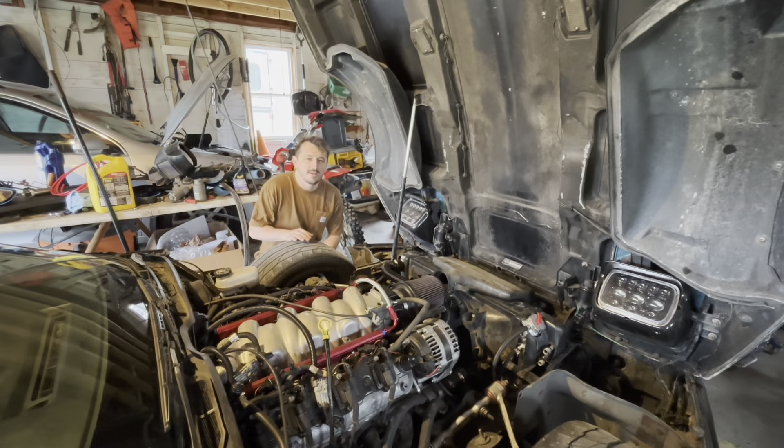Today I want to do something a little different, something more creative, and probably there's other people out there that have this issue, that have LS swapped their C4 Corvettes.

As you can see, I basically have an issue where my intake temps, it's only like 70 degrees outside, and my intake temperatures are seeing 130, 135 degrees, and it's still cool out. Once summer comes, I expect probably to see 150, 160 with all these underhood temperatures and heat coming off the pavement.

So this is a stock air box. I have a little under 3 here and a 4-inch off the throttle body. So my dilemma is, how am I gonna get this connected into something like this while avoiding this big restriction here.

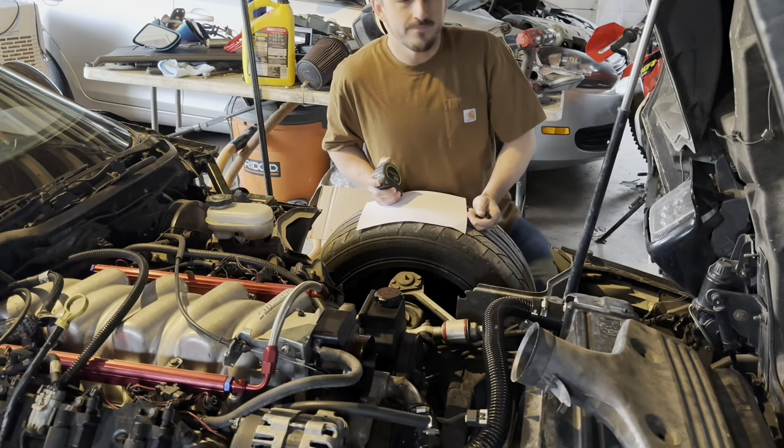What I want to do is design on FreeCAD and 3D print something that comes 4-inch up a little bit, ovals out, and connects into this factory air box. Alright, well, time to get measuring.

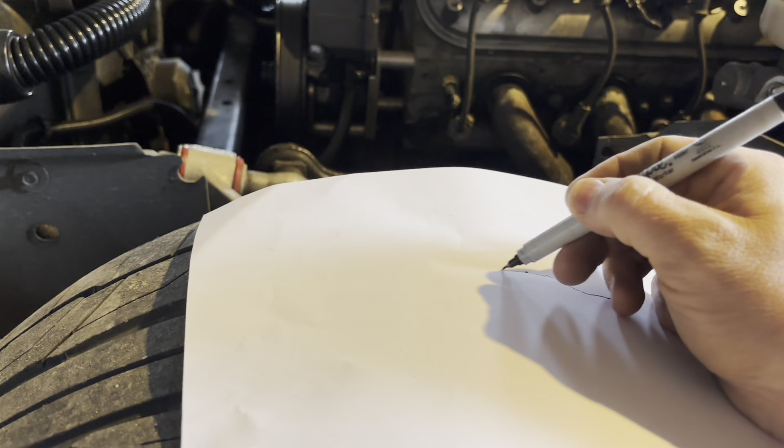Up to where that's gonna be, that's about a 3-inch riser. So basically, I know I'm gonna have a line here. It's gonna come out and immediately have to go up, across, and kind of slope back down.

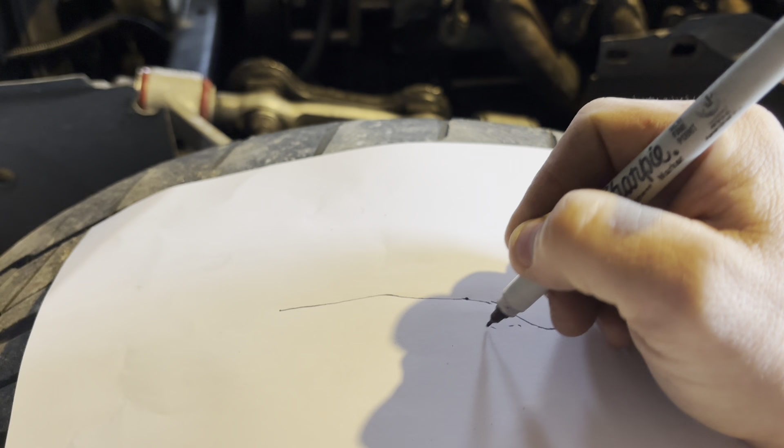This is obviously a very terrible drawing on a tire, but I know that the distance between here and about the peak where that radiator is, let's just call it here, this will be the radiator. This height right here is going to be 3 inches.

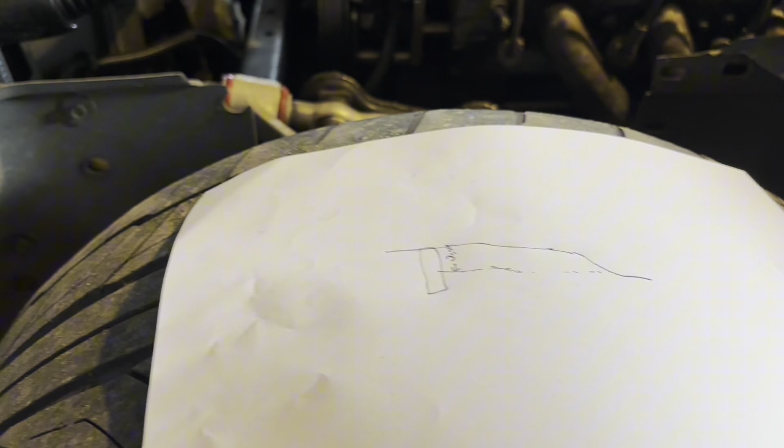And I might have to do a couple iterations of this. And then I gotta take my tape measure again, but kind of measure this way.

Overall length of this thing, I'm gonna have a silicone coupler on the throttle body, but the overall size of this thing, let's just call it 15 inches. This is 15 inches, so I'll have to print this in 2 sections.

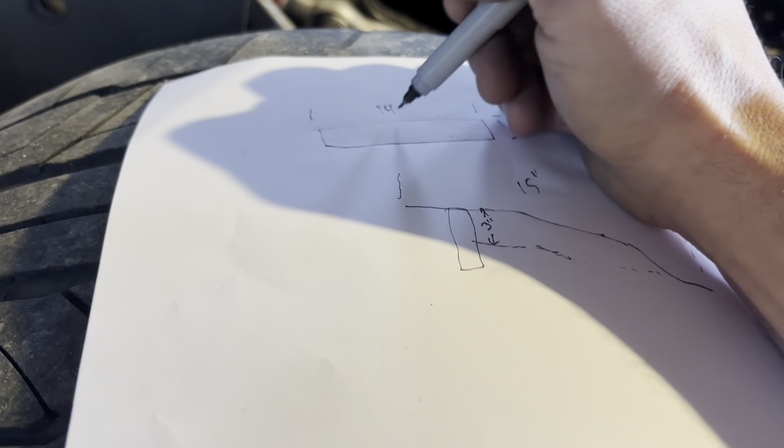It's gonna have to be something like this, it'll be like 1.625. And the width I measured, never know, could be wrong, about 14. Let's call it 14, this is just gonna be a test piece anyways. 14 inches.

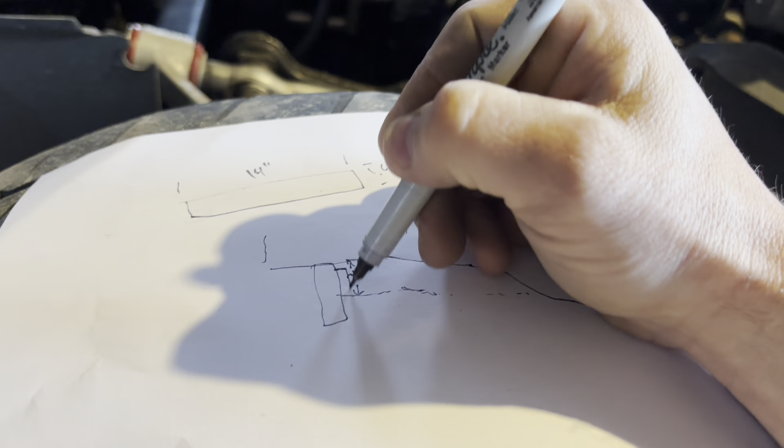And the point at which I need to be fully up and over this high spot is about 10 inches. This is my radiator, so my radiator fan kind of comes off like this, and there's a little high spot. But this distance is about 10 inches from here to here.

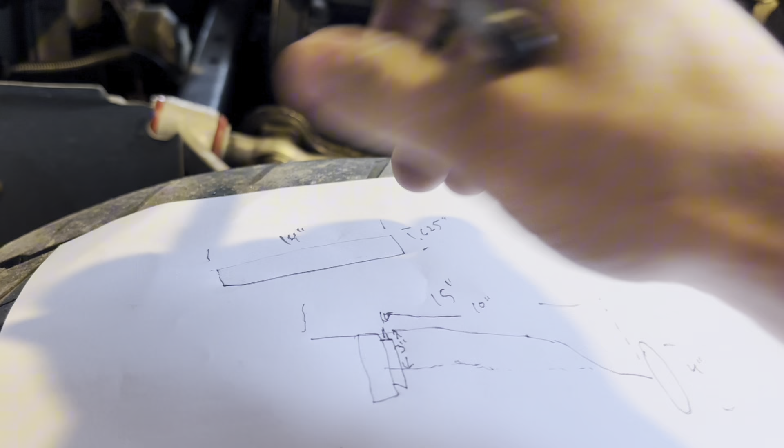So basically the way I'm gonna draw this thing, I gotta draw my 4-inch diameter over here in CAD. And then over here, I'll have to draw this rectangular piece over here. And I have this line that I'm gonna draw and tell it to sweep.

And then you go into this pipe function. You can say, go from here, along this line, start at this shape, and extrude a pipe to this shape, which is gonna be on this end, and it will automatically morph that.

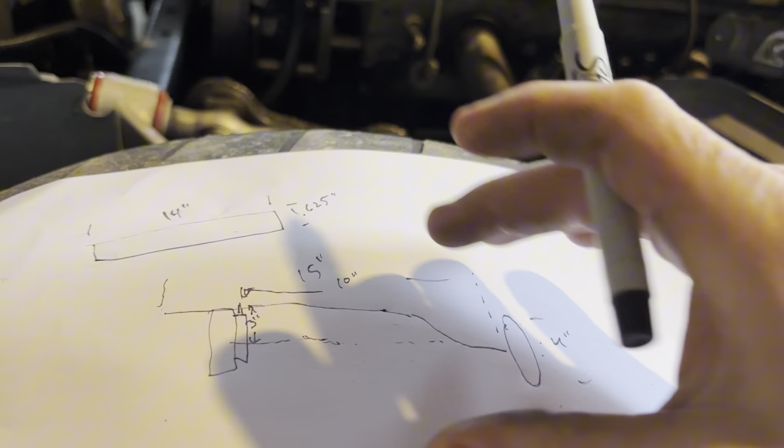And then I can get it in, play with it, see what needs to be changed, edit this awesome sketch, and then reprint it again. So let's go take this and transfer it over to the computer.

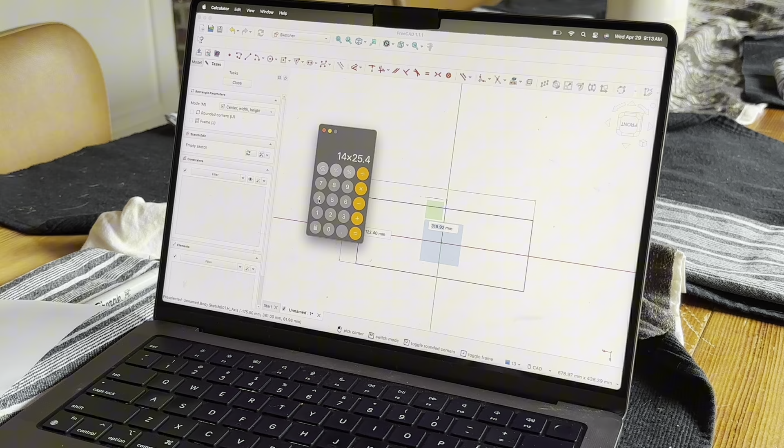So my original sketch would be this circle. I'm gonna say, bam, I wanna use this. I'm gonna sweep this along this spline, so path to sweep along. I need to add an edge.

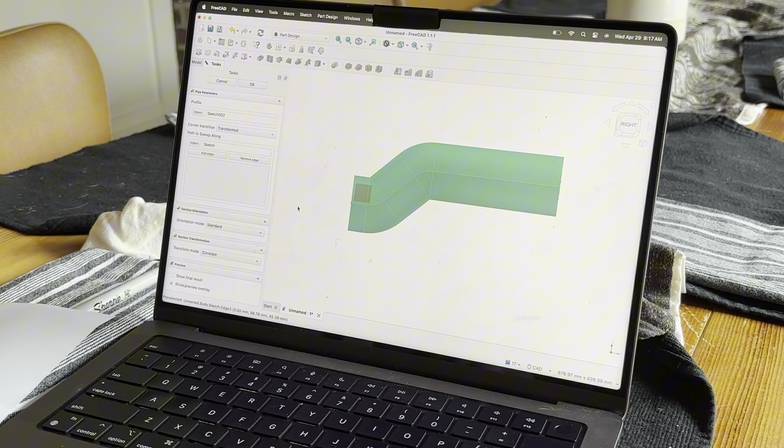Okay, so as you can see, you have a 4-inch pipe following this, but I actually want it, so right here you say section transformation. I want to do multisection because I want it to kind of fan out to this shape right here.

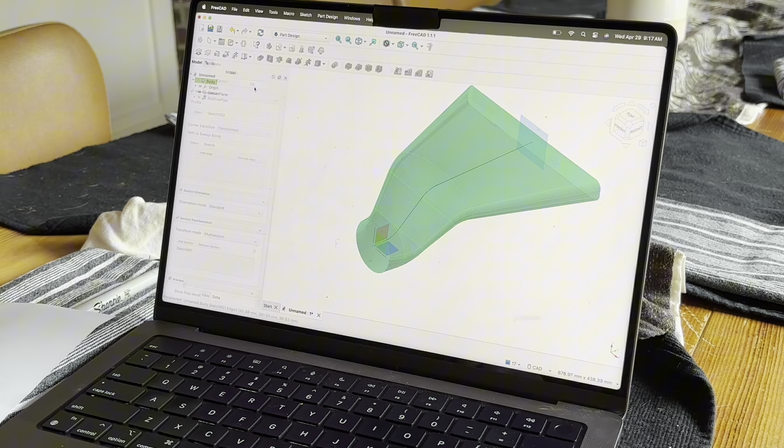So I will go add section, I'm just gonna click on it. Bam! Ain't that the coolest thing you ever seen? All right, so there it is. And that's kind of the idea.

I have a feeling I'm gonna have to actually take this sketch and make another one here so it does this transformation a little sooner. And what I'll do is I'm just gonna kind of play with this a little bit.

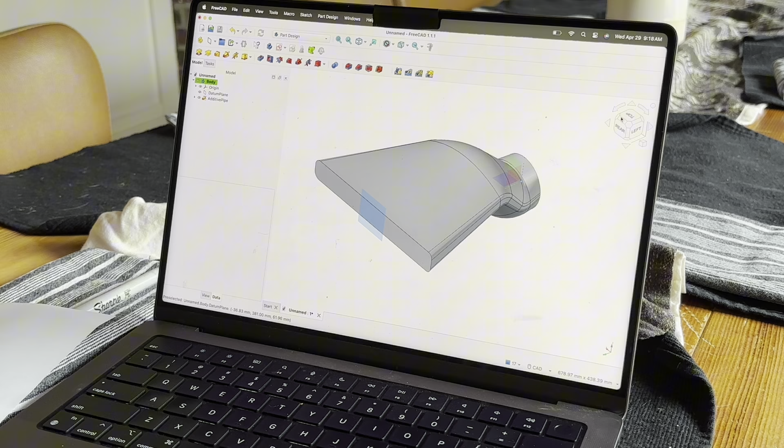I might end up taking this sketch, sweeping it down this way and putting a little bump in it at the point where my radiator fan is because I don't want it to hit. But that's also something I can probably heat up with a heat gun and warp it to where I want it, then take a measurement of that on the second iteration.

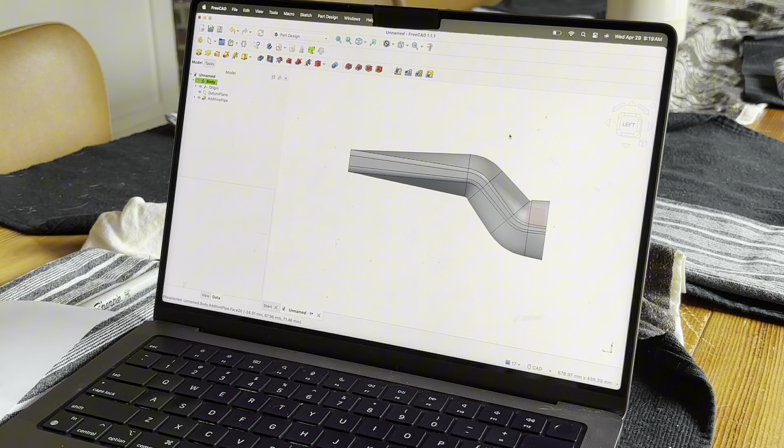So open this up, boom. As you can see, this thing's huge, it's way too big. I'm thinking that I'll definitely have to break this thing up.

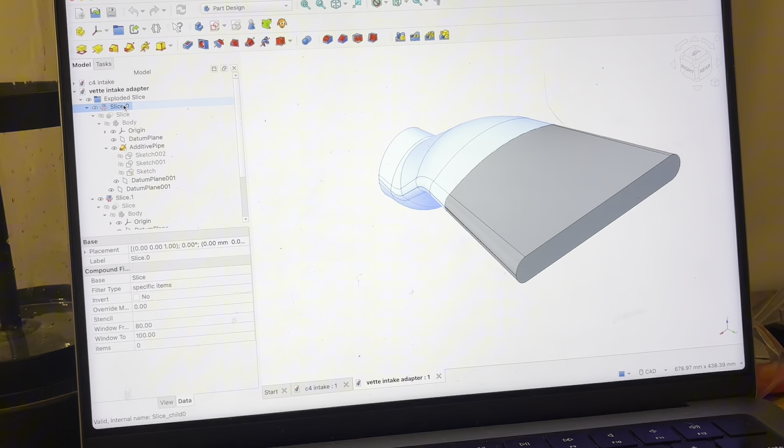All right, so just a quick check-in. I was actually able to finish this and slice it into 2 sections that could be printed on my printer. And here they are, the 2 plates that it's gonna be printed on.

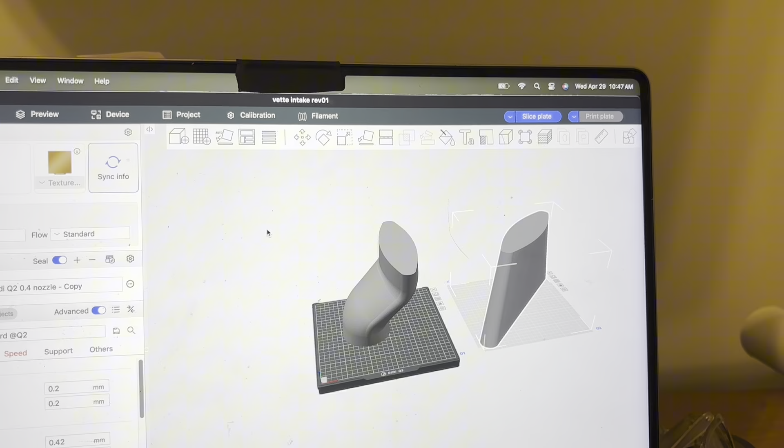Currently printing this one, and then I can print that. It'll be just like a butt connection on this surface to this surface for now, but it will be turned into a slip fit once I finalize the overall design, just because modifying that's gonna be something new to me, but I'll be able to do it. And that's where she's at now, it's printing. I have like an hour and a half to 2 hours left in the print.

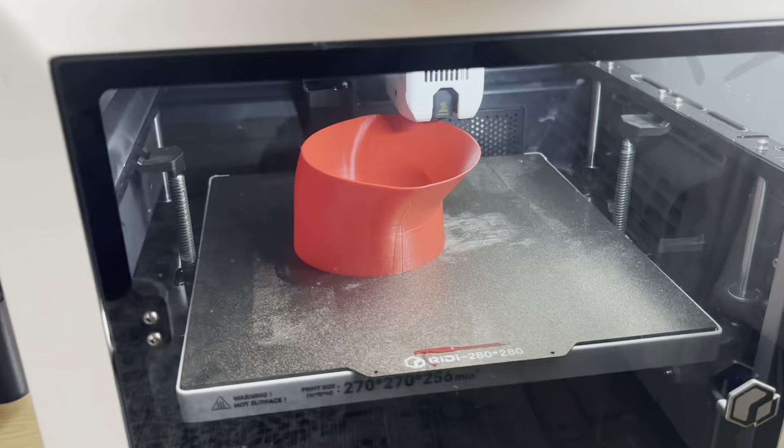So let's go get our eyes on it. And this is what it looks like in real life. But yeah, just working on it.

So I'll get this print finished, start the next one. I'll get them glued together real quick and we'll go test fit them on the car, see if it's even close. I fully expect to have to change a bunch of stuff and modify things, but we'll make some changes along the way. We'll see you in a few minutes.

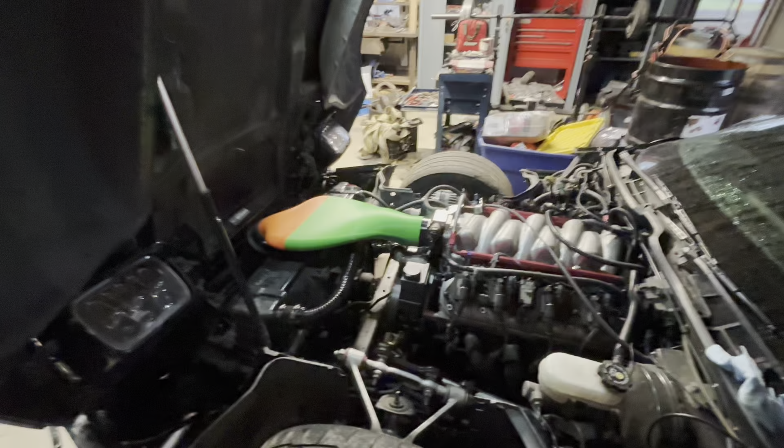Hey guys, so basically this is what I've come up with so far. This is by far not my final design.

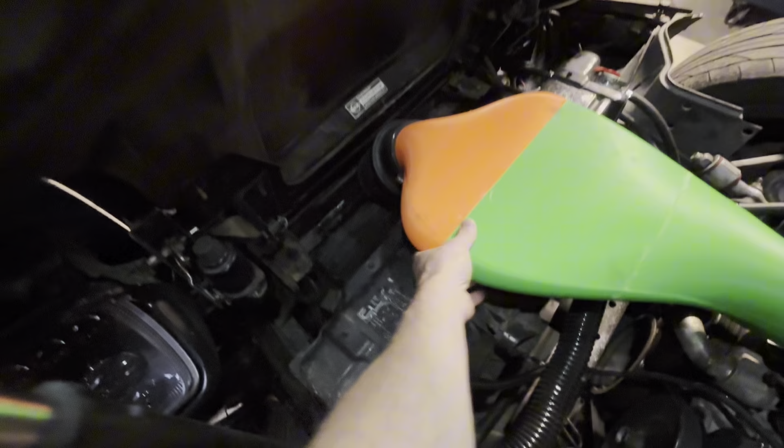4-inch goes to, I forget what this is, I think it's like a 9 or 10 inch wide oval down to the filter. The filter, I realize, is still hitting the front here, which jacks this up, so I can't close it because it'll hit. But without this filter, it actually does sit just fine. So one thing I'm thinking about doing, I'm kind of limited to the CAD on this because going from 4-inch to this big gobby shape down to a 4-inch with the tools I'm currently using.

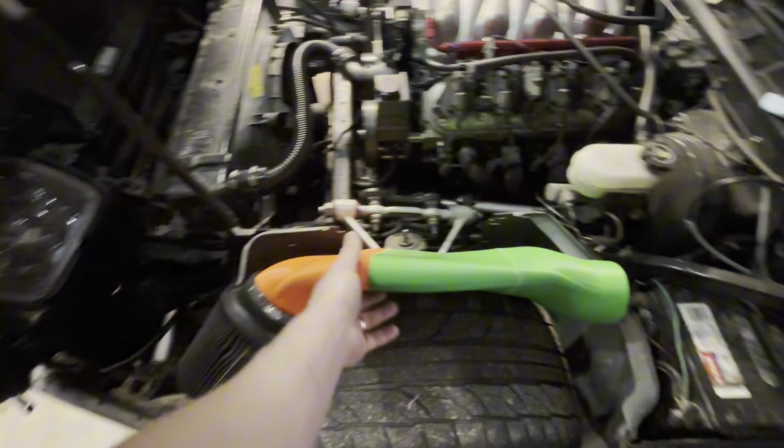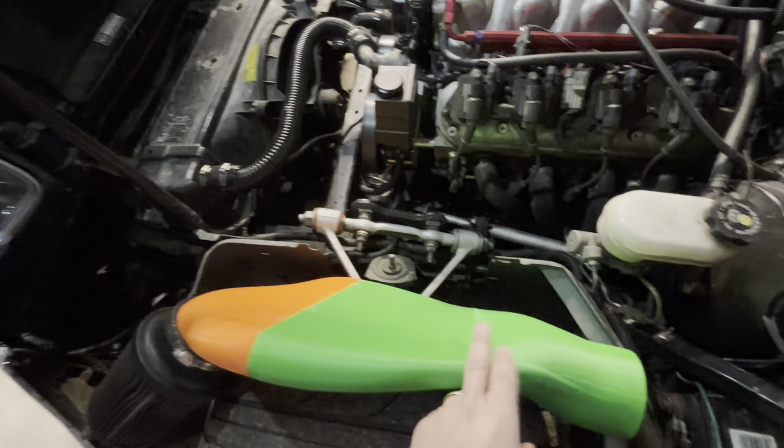And my only know-how so far is this additive pipe feature, and it does its own little wonky shapes here because it's trying to interpolate how to get this from a 4-inch here up to this shape, which there's another one here. I had to put one here because it would try and do some crazy stuff, so I had an oval to a bigger oval to another oval somewhere. I think it's right on this 45, or actually like a 22 and a half, and then at this 45 there's two 4-inch circles to try and get it into the filter. So it looks like it might work.

This would be carbon fiber or possibly some other 3D printed plastic.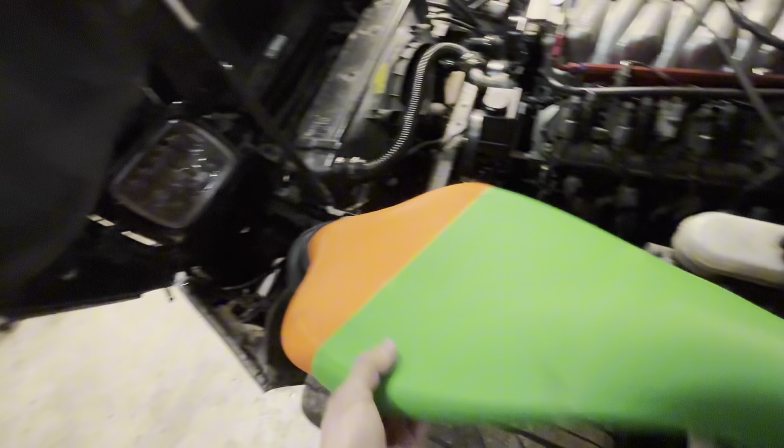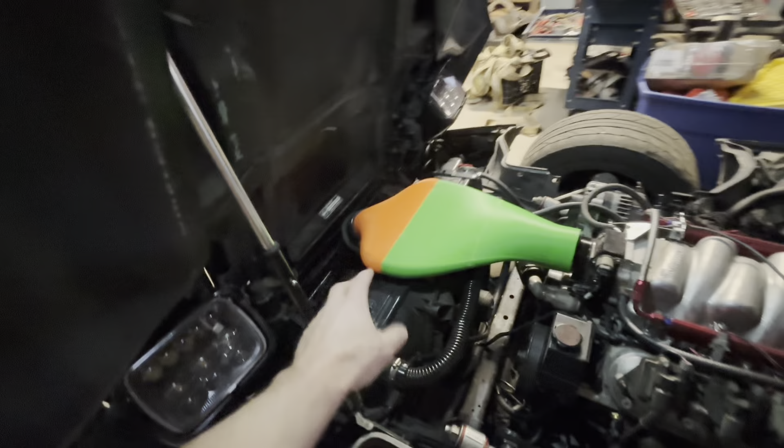But now my buddy sent me a filter that's actually for a C6, I believe. It has an oval inlet or outlet, whatever you call it. This flange area here is oval, a big wide oval. It might be 6 inches by 2 inches or something like that. I gotta measure it when it comes in, but I ordered it. It's actually a BBK 1704, so I think it's shorter than this one, this way.

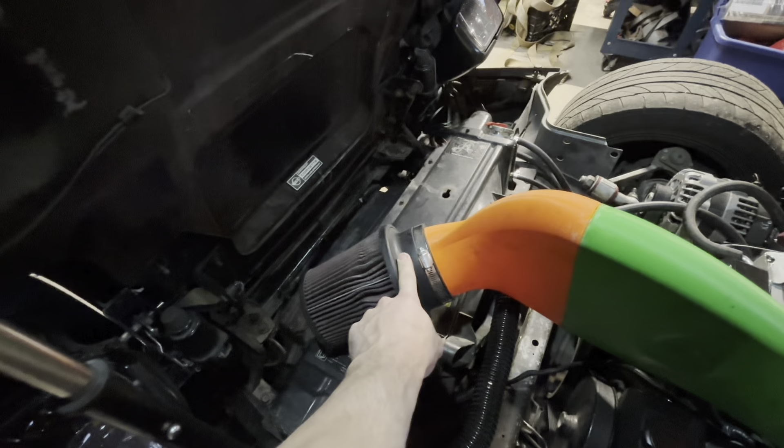So it'll even fit in here better, because if I put this on here it actually starts crushing the filter there. So basically using a 6-inch filter isn't doable.

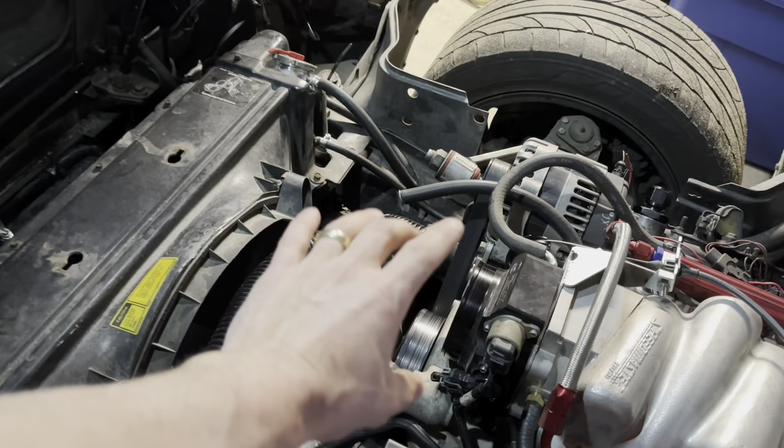I was like, well why don't I just come down off of that, and if I come down off of that and do a 90 one way or the other, maybe I could put the filter on sideways. But let me show you. It's like, well, maybe if I just set this in here and just come up, big oval offset over here and into a 45 there. Maybe I could even get pretty drastic, put it in the middle where there's the most clearance. But basically, if I bring this down, it actually crushes that filter and ovals it right out.

So basically, I'm at a standstill, not because I gave up or I'm struggling and stuck, but because I ordered a BBK 1704 filter, that oval one, and I'm just waiting for that to come in. It's actually going to be in, I think, the 19th, which is next Tuesday, I think.